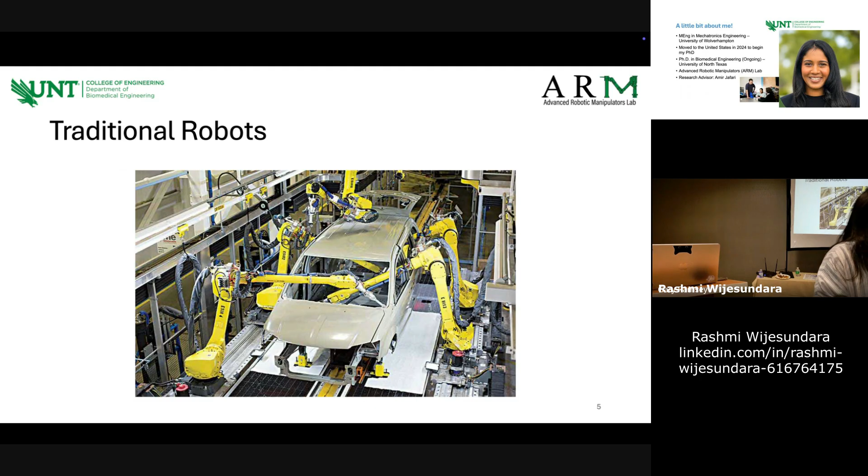Yeah. But also, the problem with these kinds of robots is, so this is a video from a few years back. I think my professor, when he presented here, he showed this video too. So it's... I don't know why.

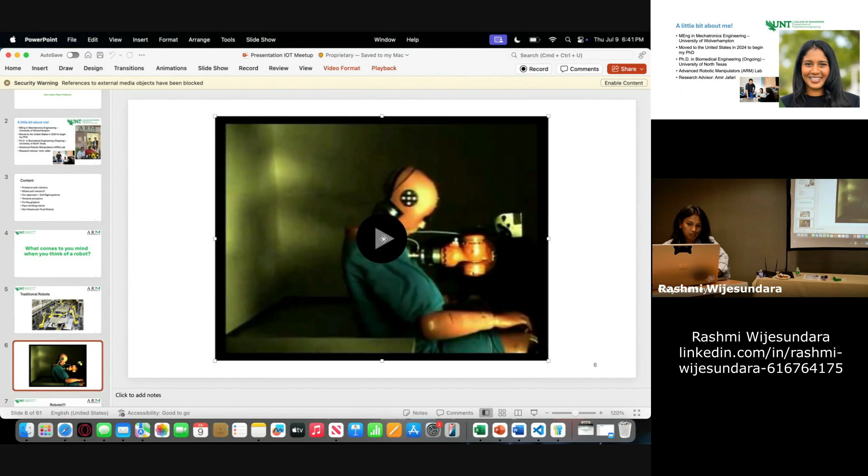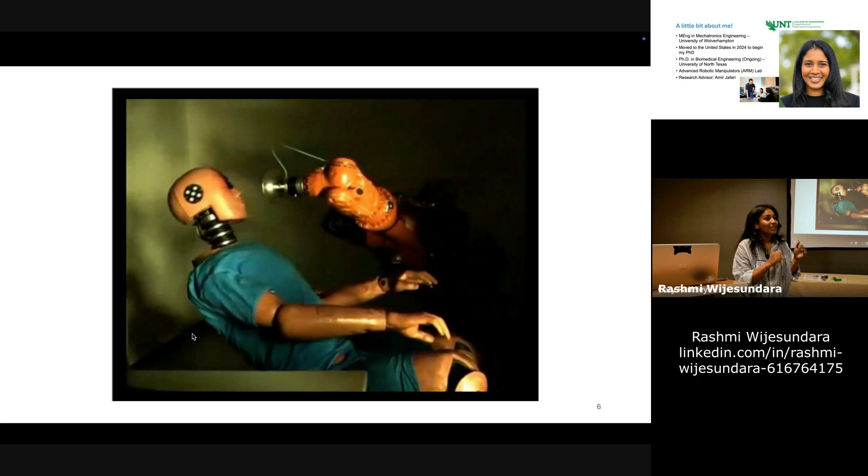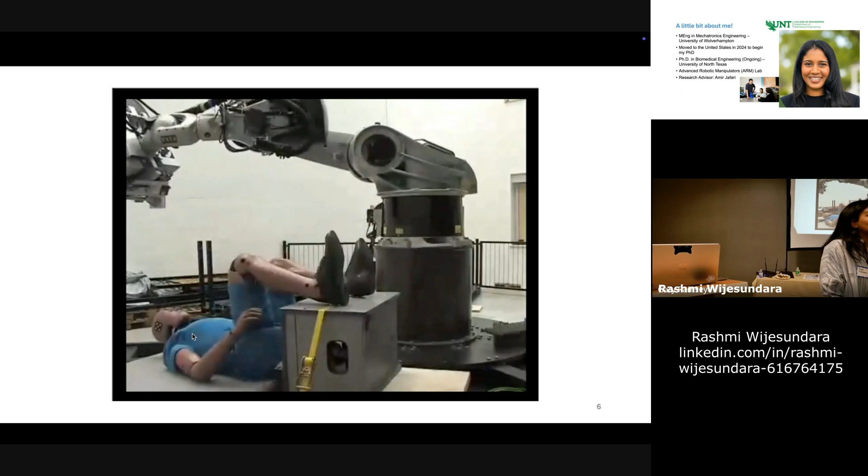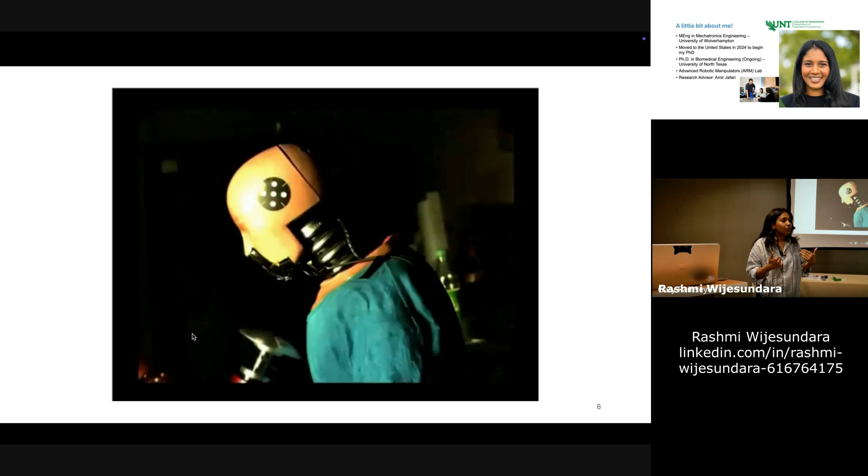So you can see that when the robot arm comes, it has a lot of rigid components and it cannot really compensate for anything. So if it comes and knocks on you, imagine a statue made out of stone and it just falls on you. So that's the problem with these rigid robots, because they're fully made of rigid materials. They cannot really adapt to the environment that we live in with humans, where humans are made from much softer materials and we can adapt to the world and compensate for little changes. But these robots have that problem.

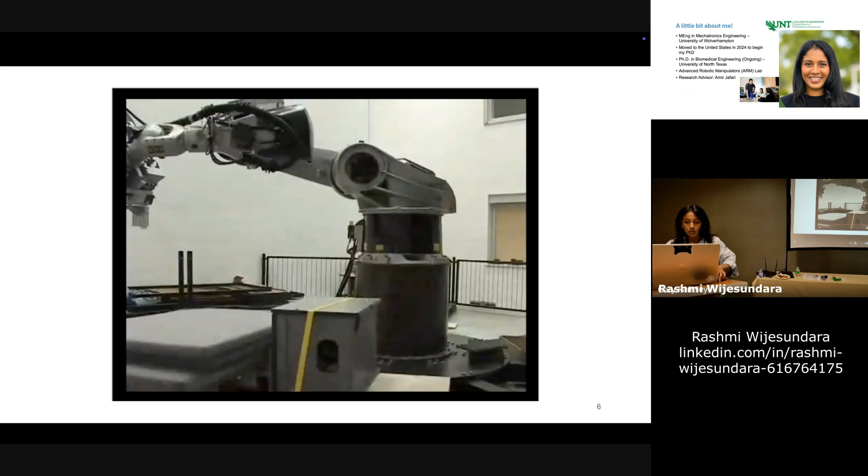So this is kind of a comparison. When I asked what comes to your mind when you think of a robot, most people said Roomba and Wall-E, but that's what we think nowadays. A few years back, starting around 1961, but most prominently around 2006, all these car manufacturing lines had the proper robotic arms. But nowadays, in 2026, we want robots not just to be in these factory lines, but to be with humans and interact with us in our daily life.

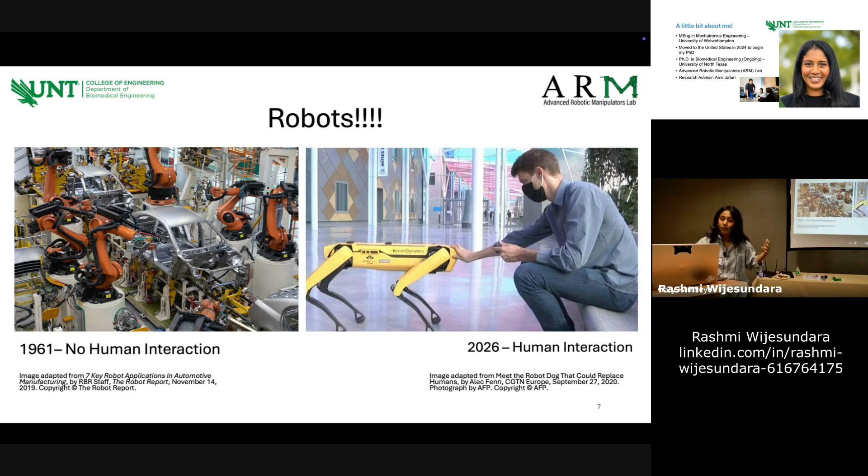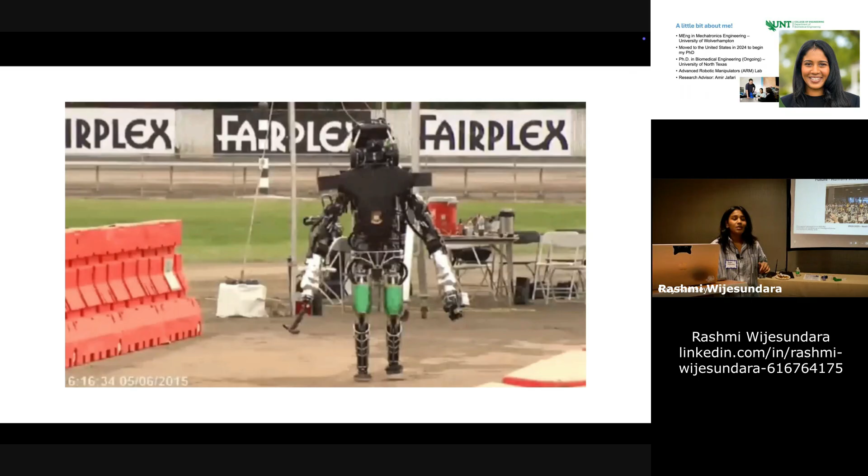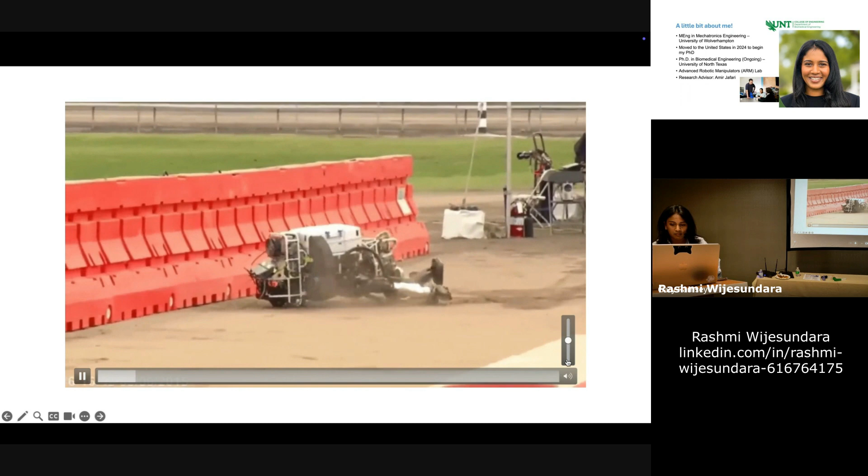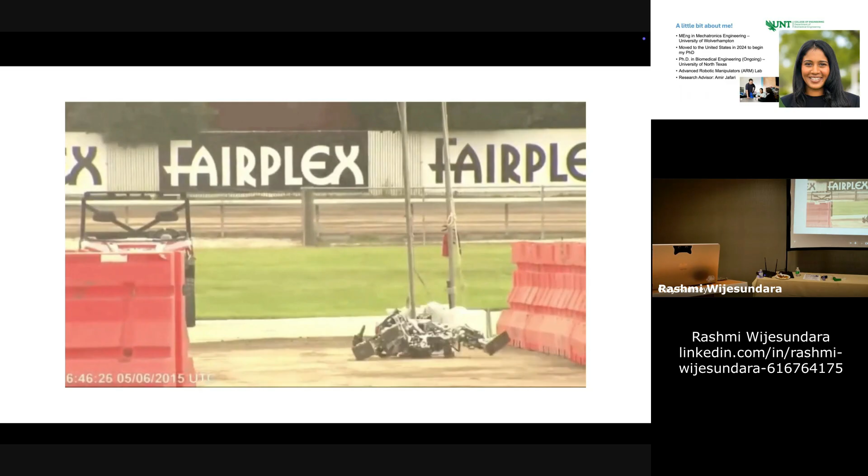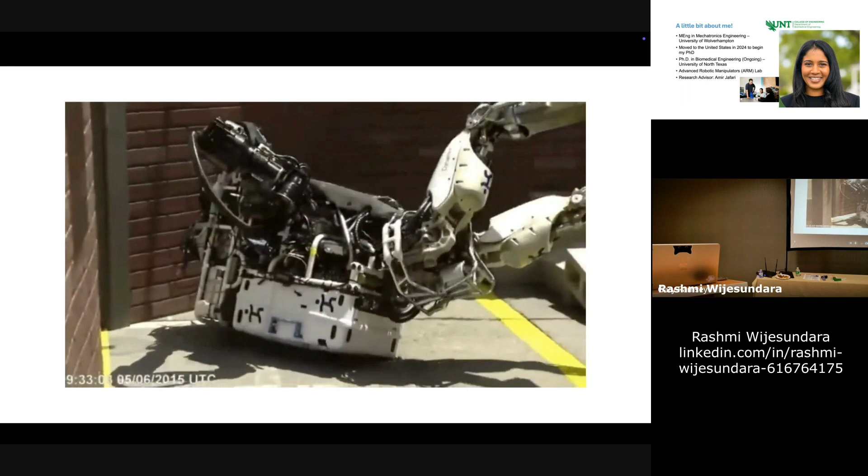So when we want to build robots for a world like that, we can't really want the robots to act more like this. So you can see here these kinds of humanoid robots. This video is from about 10 years ago. You can see that when these robots walk, if there's even a slight change in the environment, for example a slightly uneven surface, or when it's walking on sand, since the texture constantly changes and the world around us is very dynamic, you cannot really make sure the robot knows exactly how to behave in all these unknown scenarios. And since the body is rigid and the robot doesn't know how to react, it could fail like this.

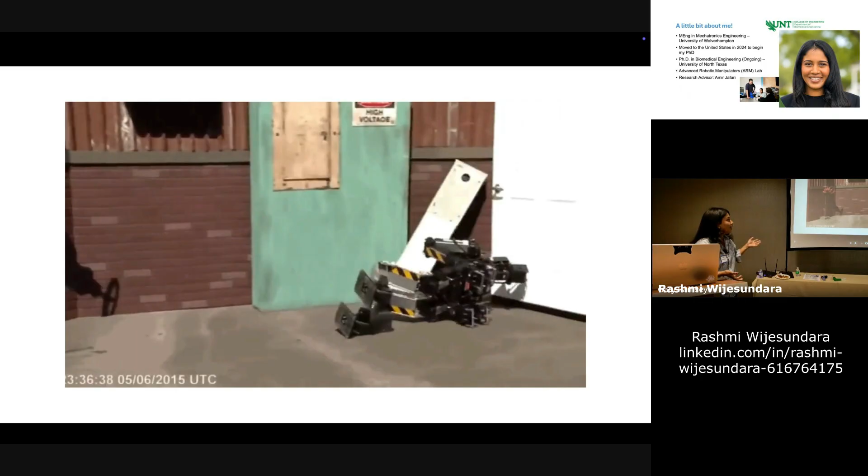So that's actually a video from like 10 years ago. But if you see videos from now, like Boston Dynamics and Figure AI, all these robots are much better than this. Most of the time they can be safely interacting with us, but still the body of the robot is rigid most of the time.

Which is good, but at the same time, it would be nice if we can make some parts of the robot softer. I'm not saying that we should make the full robot soft, but some parts of the robot could be softer, so it's better optimized and not fully relying on just software itself. So some researchers have thought, how can we make these kinds of robots a lot more compliant and adapt to the environment better?

One of the first methods was something called a series elastic actuator. Here the idea is instead of having the motor and the gearbox directly in contact with the external force, whatever the robot's going to come into contact with, you have something like a spring so that it mimics the softness in the robot. And this is really cool and it works.

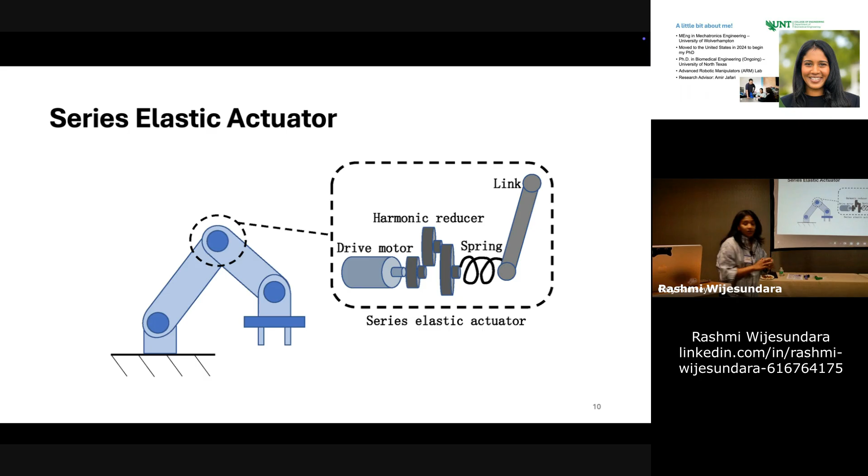If you have ever seen any videos of Boston Dynamics Spot, have you all seen any? You see that the robot kind of moves like a real dog. And it does that by mimicking this softness in software and in the motor design, not by actually having any soft components. But once again, this is kind of bulky and also not very precise.

So instead of that, around 10 years back, people have looked into the approach of building robots with softer materials. Are you familiar with Baymax from Big Hero 6? Yeah. So that's more of a robot we want, because I don't want to handshake with a robot and feel like a metal hand. I want to feel exactly how I feel around humans.

So this is actually one of the first soft robots that people developed a few years back. The idea is you use a soft silicone material, and this is pneumatically or hydraulically actuated. I can pass it around to get a sense of what this material is like. You have a narrow channel in it that you make in a certain geometry, so when you actuate it with air or with hydraulics, it gives us a certain bending motion. This is one of the first and simplest ones, where you could have multiple of these and use them to grasp an object.

What's cool with these kinds of grippers is you don't have to have any sensors. As long as you actuate it and it's around the object, it will easily be able to grasp the object. And you don't have to say that you have to close at this point, or you have to apply exactly this much force. So it's much simpler and easier. But there's a small problem with these kinds of robots, which I will get into. I'll pass this around so you can get a feel for what the material is.

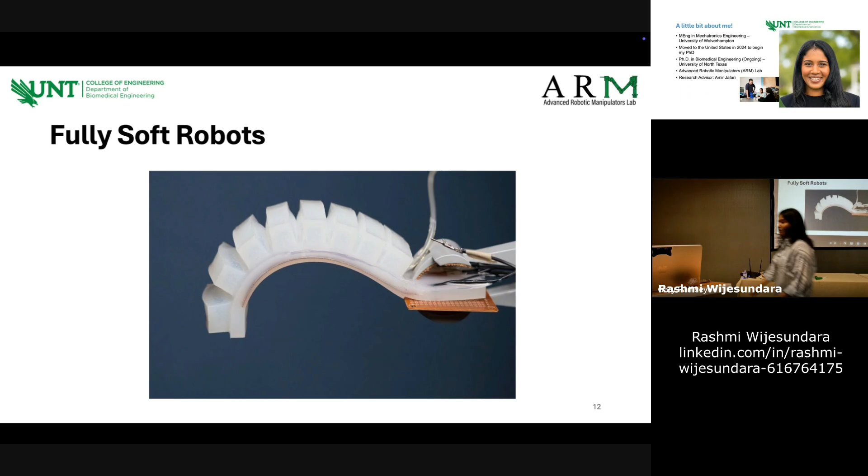As I said before, traditional robots are really good at performing repeatable tasks, they're very precise, and they can handle a lot of payload. Meanwhile, soft robots are inherently compliant, they can safely adapt, and they're much more human-like. So the question is, what if we have the best of both?

In nature, we see that biological systems are not just made from rigid materials. For example, if I take my hand, I have soft skin around bones, and then I have cartilage that can change stiffness. How humans and nature solve problems is not just a software problem, but also a mechanical problem. And together there's some embodied intelligence in these systems.

So what if, instead of approaching robotics with just a rigid body with really complex programming, you think about and optimize the body of the robot? In my research, I try to take inspiration from nature and biological systems, study the fundamentals of how they work, what we can use for robotic applications, and try to implement that. So these are a few of the animals and plants I'm interested in studying and mimicking their motion.

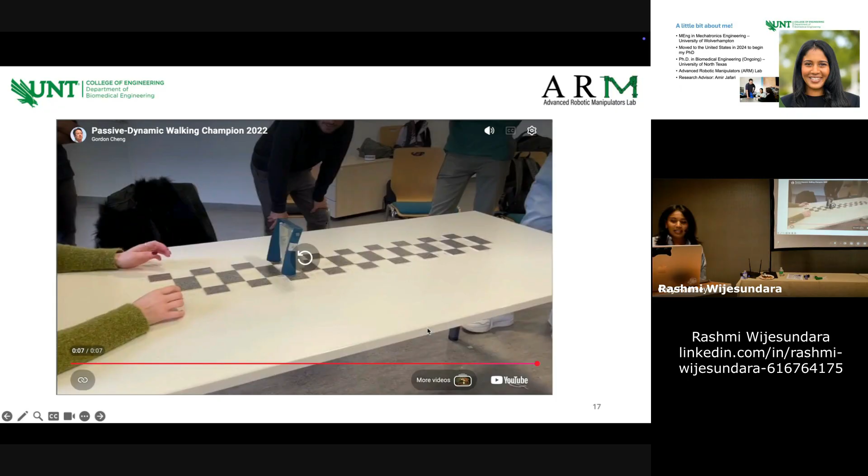So I want to show you all a video of what I mean by this embodied intelligence. So here you see, this is called a passive walker. It doesn't have any motors, it doesn't have any sensors, and you don't give it any power. But purely from mechanical design, you can see that this robot is able to walk through this path by interacting with the surface that it's on. So that's kind of what I was talking about in the sense of mechanical intelligence.

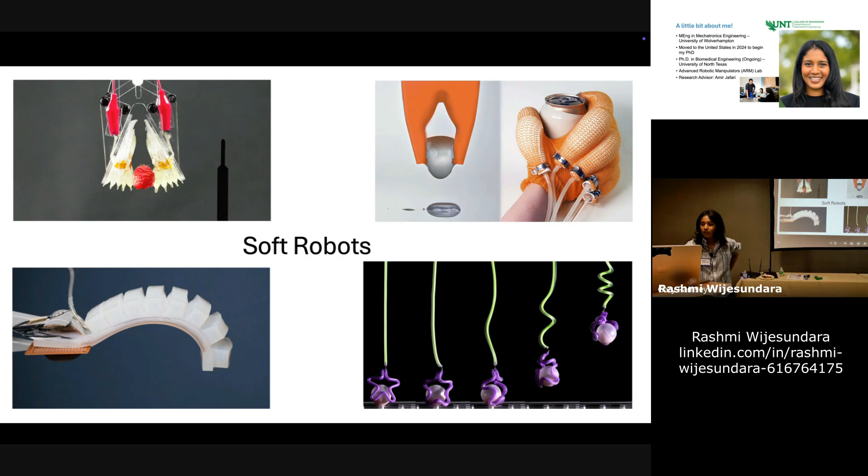And this is kind of the gist of a few different types of soft robots. So this is the previous one, and this is a pneumatically actuated glove that can help with hand rehabilitation. This is mimicking octopus tentacles for grasping objects. And this one's called a HASEL actuator, so it uses an electric field to actuate the fluid inside and actuate the ripple. So that's a few types of soft robots.

So this is another type which is inspired by a plant vine. Have you all seen vines growing on walls? These vines usually attach onto a surface and they just keep on growing towards the top. So the idea here is, imagine I'm wearing a sweater and I have a long sleeve. It's like a long tube. And all this material from the tube is pulled into one end. And when you pressurize it with air, it just gets everted out.

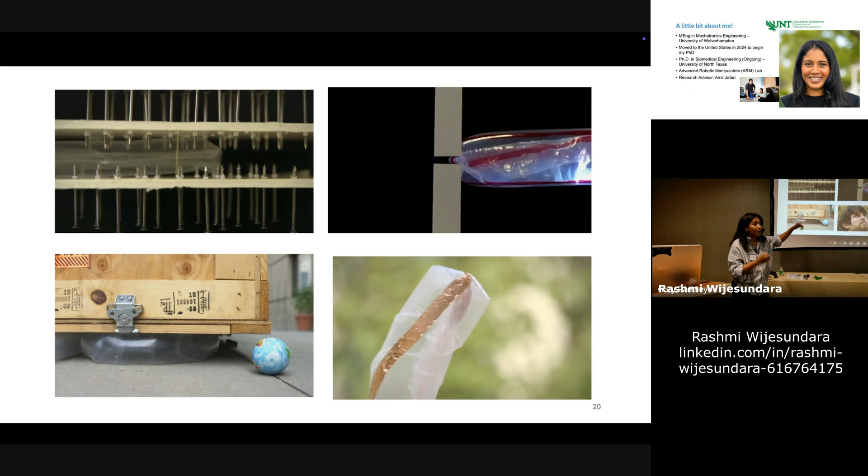And the cool thing with robots like this is that as long as you supply it with air, it can still keep on growing. So this is very useful for some kinds of applications. Let's say over here, as long as you make it with a fire resistant material and you fill the inside with water, you can evert out the body and use it to extinguish fires. And because the body is soft, it can squeeze through tiny spaces and adapt in very cluttered environments.

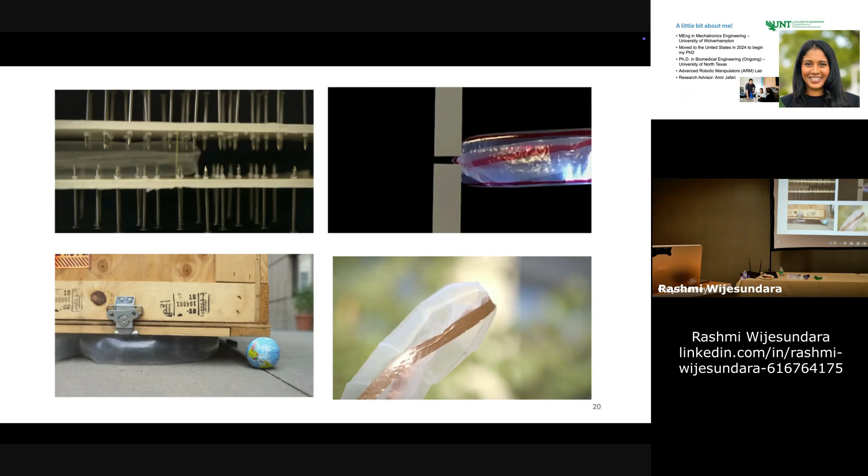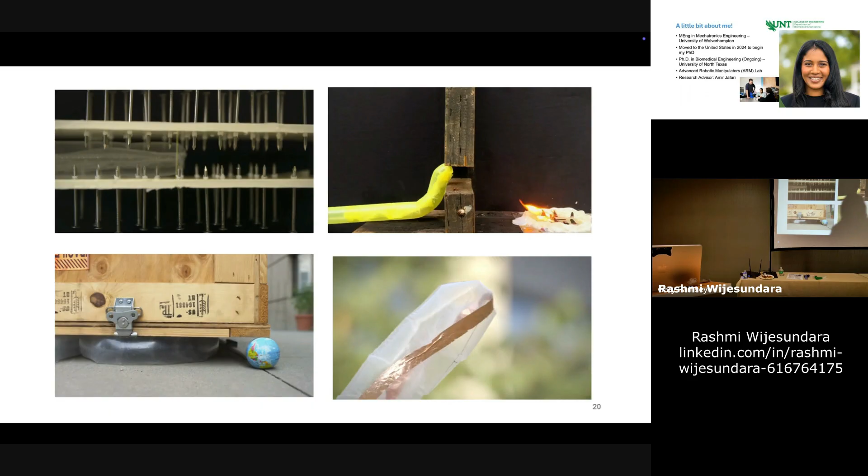And a cool application that I saw of this robot was when you want to dig underground, like pipes and holes. As you keep on digging down, it gets harder and harder. But using a robot like this, as long as it comes into contact with the sand, it just pushes sand away every time. So you don't have to apply a whole lot of force and you can dig deeper and deeper. And they used it for anchors in spaceships. So that was another lab I saw working on it. So this was kind of how it works.

So any questions so far, anything that I should explain in more detail? Just the idea between constructive robots and ISR sensory data collection, how the telemetry might be moved and collected and analyzed. So the thing is, most of the examples I showed now don't have any sensors. The idea was, since the robot's body is soft, it just passively adapts and moves. But there are some applications where you'd really need it to move in a certain specific direction. And I've seen people use different pneumatic lines or different wires with tendon-driven pulley systems to make sure that the robot goes in a certain direction.

Also, I've seen some people mount a little camera at the tip of the robot with a device so that as the material gets everted, the sensors and the camera get pushed outside and always stay at the tip. So then you can use that to make it move. So it doesn't sound like they're, let's say, autonomous. They're not autonomous. Yes, they're not. Okay. All right. That's helpful. Thank you.

But that's the current state it is. Okay. But people are working on making it autonomous. So here the base of the robot always stays at one corner. But I've seen some people working on a device where the motor and the everting system is within the capsule. It's like a little capsule, and then it just keeps everting itself up. I'm thinking we make an autonomous biomimetic design. Oh, okay. Yeah. That's interesting.

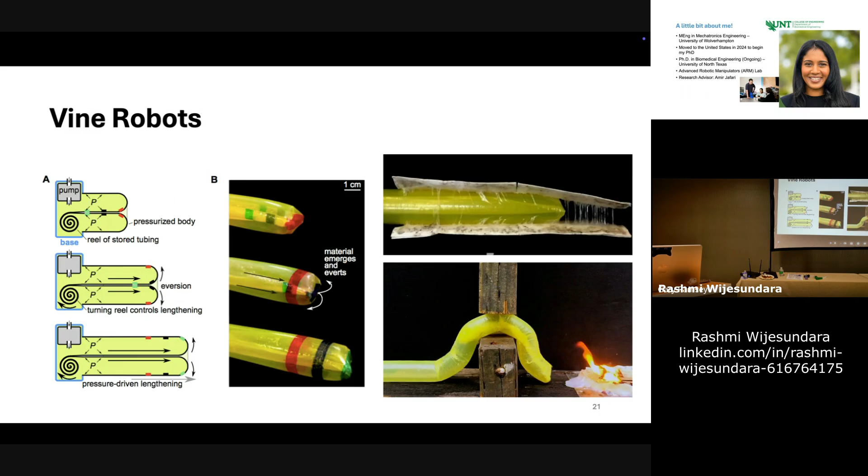Yeah. So as I said, the cool thing with soft robots is you can use it for very task-specific applications where previously traditional robots were not able to be used. For example, some of the applications that I have in mind are in surgical applications where you deal with extremely soft tissue and also extremely complex anatomy, and maybe underwater applications where the pressure is high, and you also deal with a lot of sea life where you don't want to apply too much force or damage the fish in the ocean, or a collapsed building, or even underwater pipe systems.

So these are all applications where my work could be used, but mostly we work in the lab and we try to develop the technologies. And sometimes in some of the work that I do, we target specific applications, but mostly I'm still in the progress of getting it developed.

So the first project that I'm going to talk about is called tentacle actuators. This is inspired from an octopus tentacle. I think octopuses are really cool, and it's one of my favorite species. And the cool thing with octopuses is, when it comes to humans, we have one central nervous system, and neurons go throughout our body. But octopuses have their nervous system spread out throughout their body. So if you have an octopus in a fish tank or something, it could sense what's going on around its body.

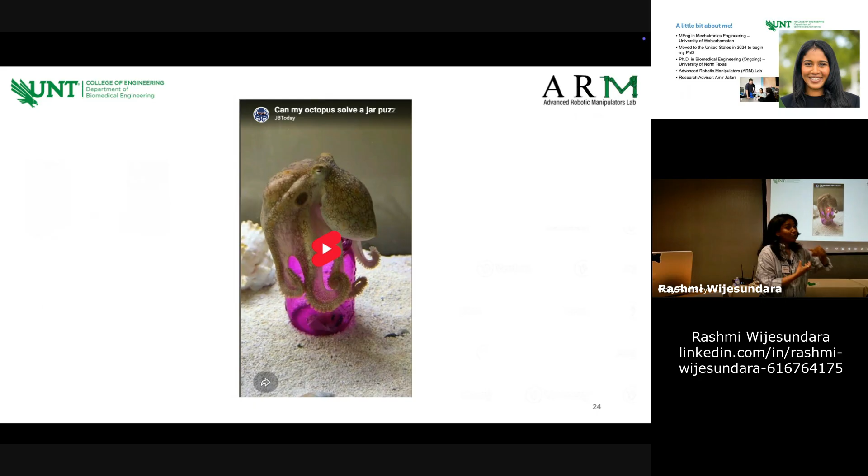And here I'm going to show you all a little clip where there's some food trapped inside a glass jar. This octopus senses that there's food inside the jar, and it wraps its body around the jar, opens the jar and tries to get this food. And what's cool about this is, imagine you had just a traditional gripper made from rigid fingers. It cannot do all this motion in such a simple way.

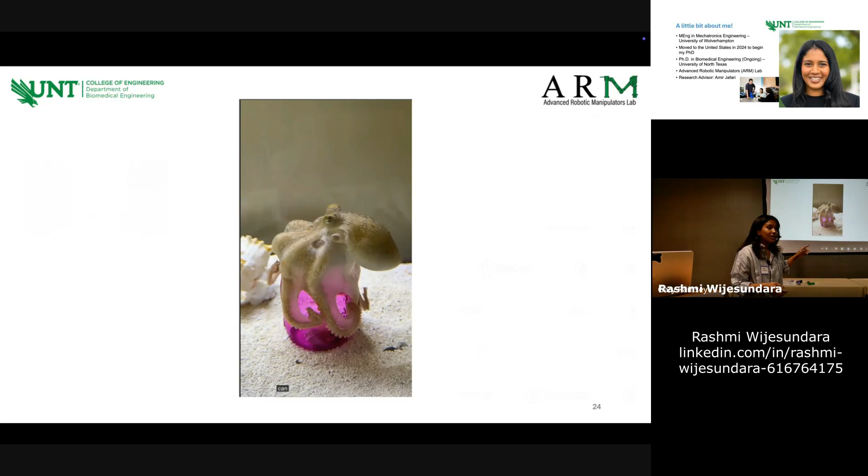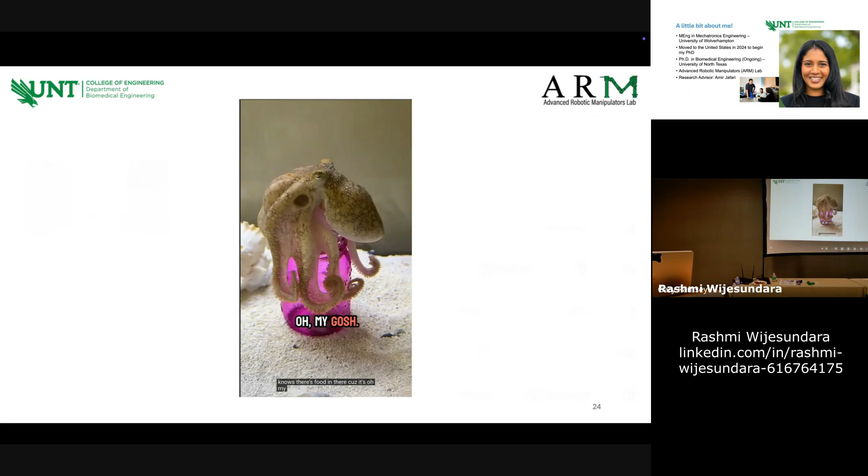But the fact that the octopus body can tune its stiffness, it has a whole lot of tentacles. It can adapt to the lid of the bottle, and then it can push its tentacles inside and grasp the food. That's what makes octopuses really intelligent, and also a really cool thing for us to study in robotics, because we can use such kind of design instead of traditional grippers for certain types of applications.

So I just wanted to go back to this slide and also show what's cool with these kinds of tentacle-like designs. One tentacle always coils, and you can design it in a way that it coils in different ways. But imagine a whole bunch of tentacles collected together. You can grasp a very irregular, soft object at multiple points.

So instead of trying to grasp something just by the hand, like this water bottle, I can grasp it at multiple points so the force gets distributed all throughout. And that makes it able to grasp really complex objects with no sensors in a very gentle way. So for the first tentacle, how we designed it in our lab: the material that I passed around is essentially like a long party balloon that's elastic. So when you inflate it with air, it expands laterally.

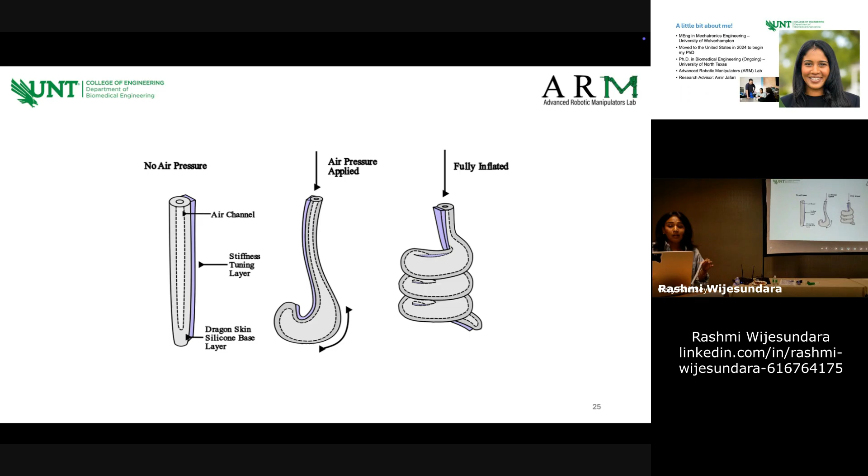It just randomly coils. But we tried to make this structure very even and always coil in the same pattern. Because then when we have a whole profile of bending curvatures, we can figure out what application we want. And we can fine tune the size of this tentacle and also how we want it to bend. And we can program how it bends.

So this was kind of the asymmetry that I was talking about, the fact that this point is stiffer than the other end gives that coiling behavior. So this is more of how we made these tentacles. I'll later show a video of how it works.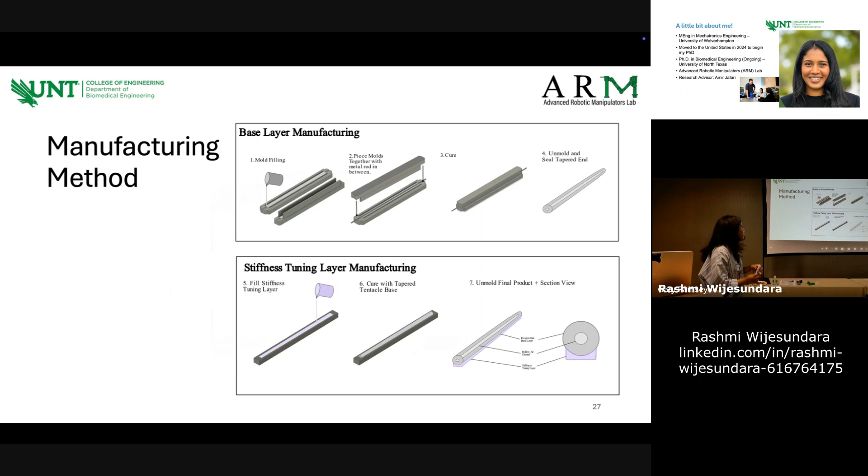But we literally 3D printed a mold, and then we used the steel rod to cast it out. Since we still cannot 3D print silicones, we cannot print these structures. I mean, there are 3D printers that can 3D print silicones, but we cannot print such big structures and it's not easily accessible. So we did the casting method.

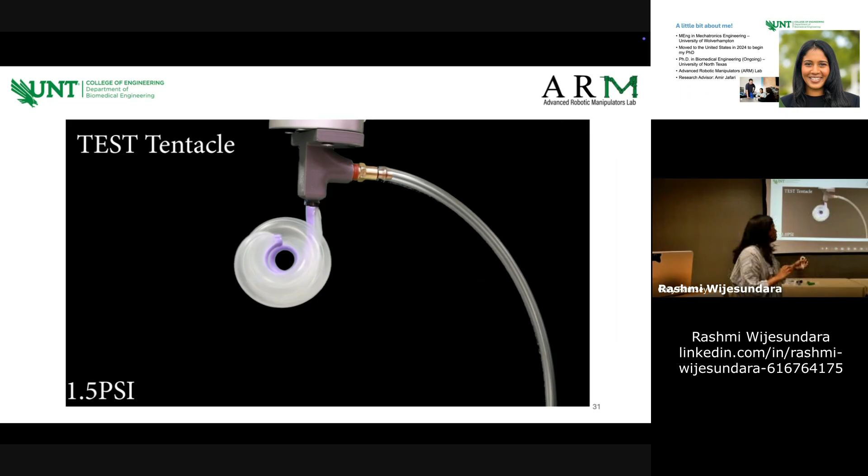And we demonstrated how to grasp different kinds of objects, and I can show video. So this is more of the different bending profiles with different materials. And this is how the tentacle actuator starts actuating. So we did some machine learning based on pressure, the geometry of the tentacle, how the bending profiles change. So anybody who wants to build a tentacle can input what size they want, what pressure it needs to be working on, and what kind of payload it needs to handle. And then it will generate what dimensions and material selection need to go into the design.

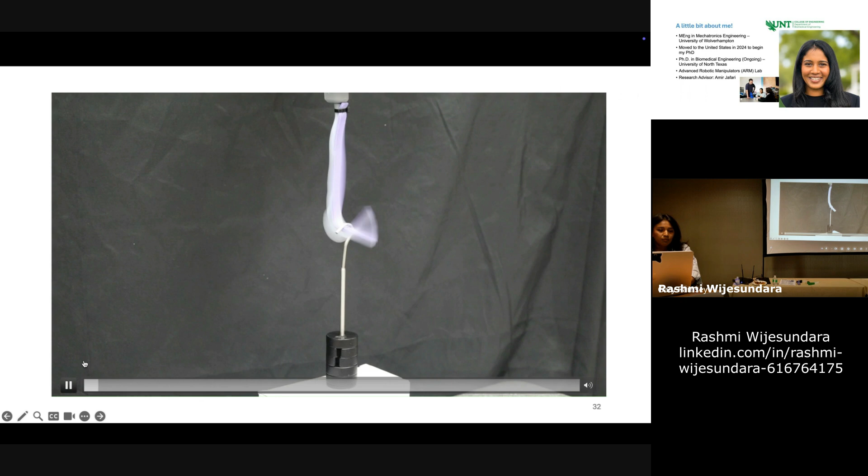And it's really interesting that this was made from a silicone called EcoFlex with a layer of Smooth-Sil, and one tentacle was able to carry around 300 grams of weight. But in some of the testing that we did, it was able to carry even more. So a bunch of them together can carry quite a lot.

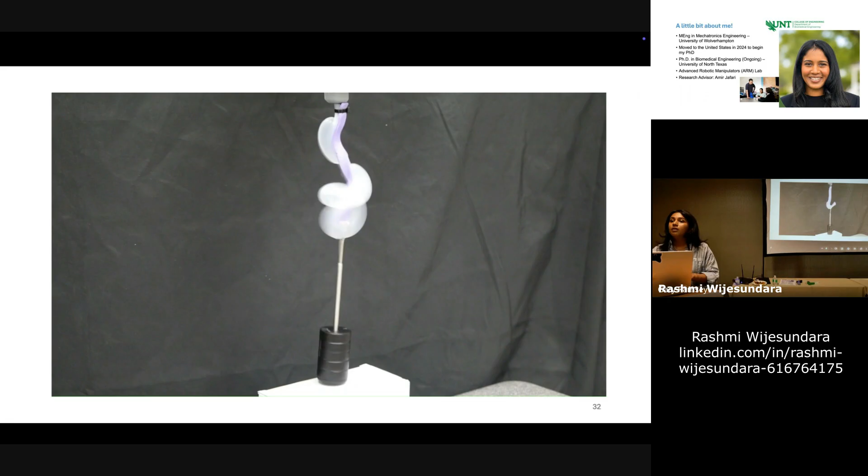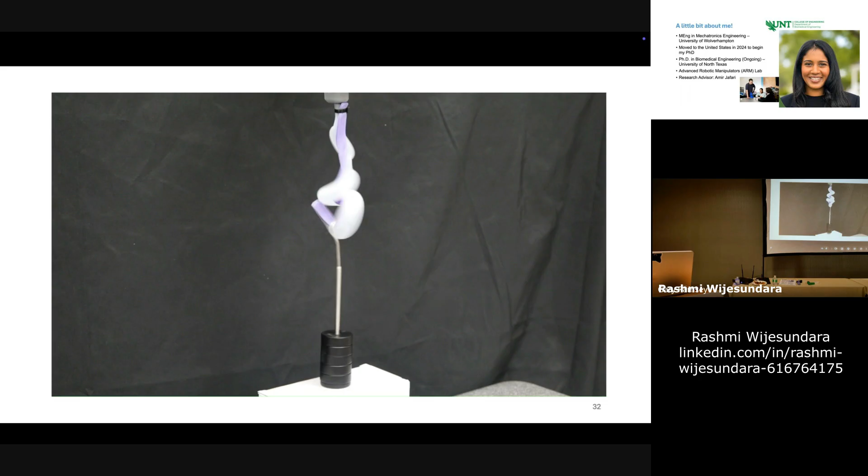Rashmi, quick question. I came in late, so I might have missed this answer, but is it always the case that the tentacles are going to be holding objects that are inherently harder than them? Or is it going to be the case where the object they are trying to hold is softer than the actual material of the tentacle? And the reason I'm asking is, how do you determine in the latter case how much pressure needs to be applied that is not going to deform or even break or spoil the object being held? What have you done in that regard?

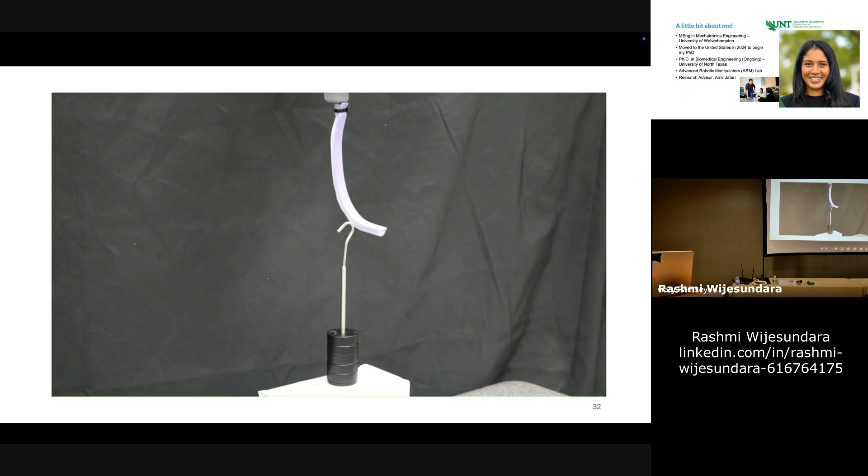So I can show you. This tentacle that I passed around is made from EcoFlex, and it doesn't have the strain limiting layer. But there are many types of silicones that you can use to build, and they all have different stiffnesses. So it depends on the application. We also know mathematically right now how much force it applies at a certain pressure, but we haven't done any testing to see how it physically applies when it actually holds something.

But if I were to design something, I would try to figure out the stiffness of the object that we're trying to grasp, and then see how much weight it has and its dimensions as well. And then based on that, you can choose even softer materials with a higher pressure. You can handle a bigger object. So you can fine tune those parameters to figure out what would suit your application best. But for most applications, it's not just one silicone. You can probably get away with using a few variations at a few pressures.

And this is how it bends at different pressures and different materials. We have tested 120 tentacles with different compositions, and we trained the model to predict for the rest of the materials beyond those we did physical testing on. So that's more of what we have done. But right now I'm collaborating with two other universities to make these tentacles much more micro scale. We just started, but I want to let you know the idea of what we're trying to do.

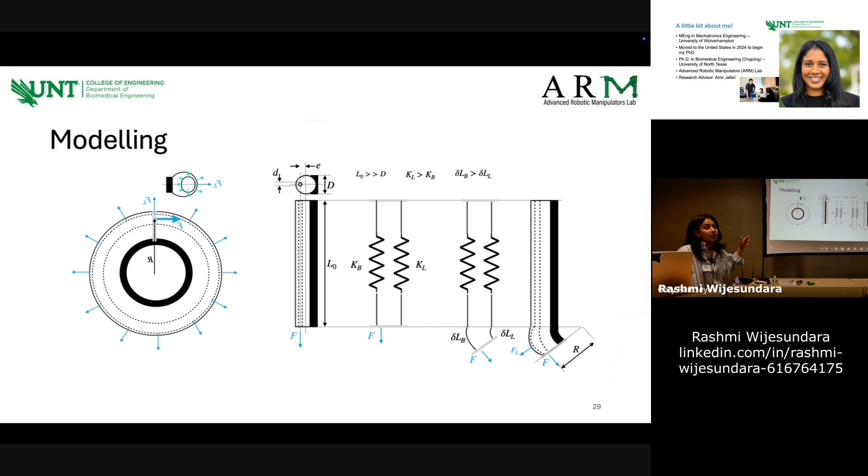But in terms of mathematical modeling, we modeled it as two springs with two different stiffnesses, which I can show. So the idea is one spring has a higher stiffness than the other one. So when you apply a pressure, it bends towards that side. And that's how we did the model. But what we actually did was we made a whole bunch of tentacles with different materials. We collected video data of all these tentacles.

Then we made a machine learning model, which one of the other people working with me made, and he predicted the curvature. So then we have a whole bunch of curvature data for different materials. And since these are hyperelastic materials, you can predict, for the material compositions that we didn't test, what the curvature is going to be like. And then we validated it with the mathematical model. Thank you so much. Interesting. Yeah.

I'm wondering, have you done any work with sensors embedded in these soft robots that will tell you how much pressure to apply based on the object that you're trying to hold, and whether to ease off on the pressure or add more pressure with the same material, so that you're not having to change materials based on the object you're trying to hold? Have you done any work on that kind of sensory feedback, kind of haptic feedback with humans?

That's actually really interesting. And that's kind of the second stage of what we are looking into. And the problem with sensors, as I said, most of the sensors that are existing, they're not super rigid, but they're flexible plastics. And when you attach them to tentacles, we have tried attaching them, the tentacle rips and tears. So that's where flocking comes in, where you take the sensor and apply a thin layer of fibers, like rayon or nylon, very thin fibers, and then it increases the surface area. And then we apply it onto the silicone so it sticks better. So that's something we're right now trying to do.

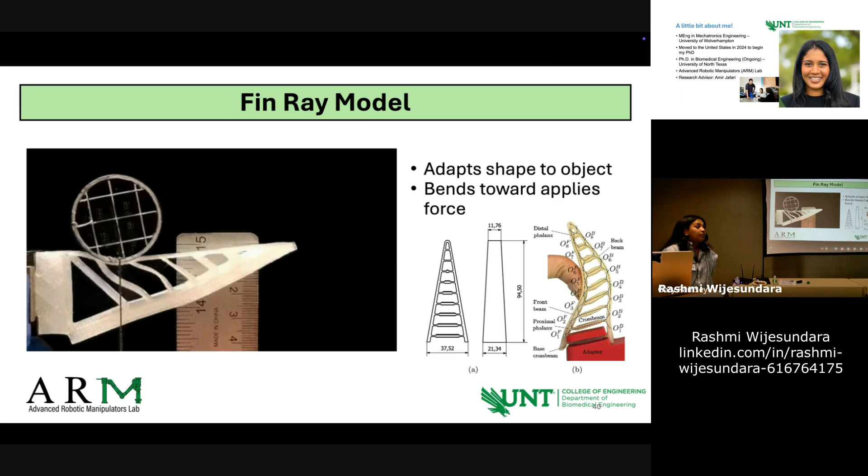So for our application that we are targeting, you can see a small clip of us doing load testing on it. What we again tried to do was, if you just make it from a soft material like this silicone, it's pretty flimsy, and I'll pass it around. But the moment I use another material like TPU, you can control how it moves much better. So we were trying to add again the Scrub Daddy material into it and see if we can increase the load on the fin ray.

So this is a clip of our design. It has the PCL strip inserted into one side of it, and there's a Joule heater as well. So when you heat it, it stiffens and softens, and then changes the payload while the fin ray still gives its compliance. And the application that we wanted to target was something called alligator forceps that they use in surgical applications, and the tip of this whole forceps is made from a rigid metal, like stainless steel. But if you accidentally apply too much force when you try to manipulate with this, they can damage the blood vessels and so on.

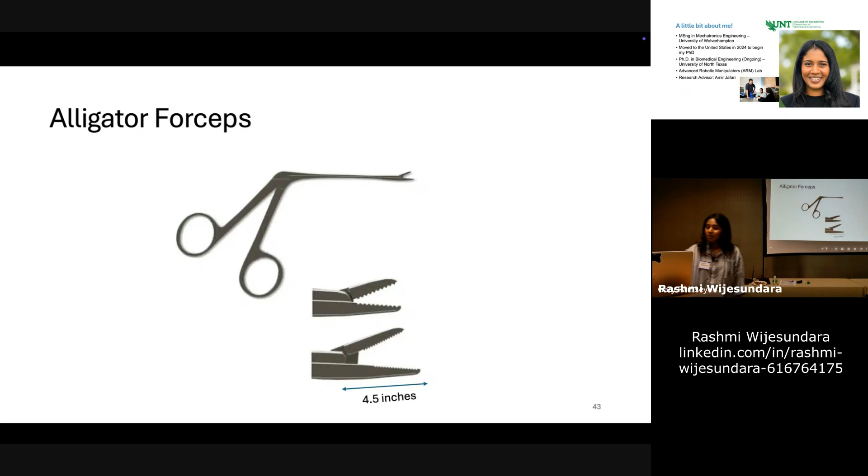So what we thought was, can we use this design, scale it down to this scale, and see if we can replace the tips of this alligator forceps. So that's what we've been working on. But the problem is, when we try to scale it down that small, it becomes really hard to manufacture, because this tiny feature is a lot smaller, and these walls are so thin. And especially with a material like silicone, it's really viscous. It's kind of like ketchup, the texture of silicone, it's that thick. So you cannot really push it into a mold that's that small.

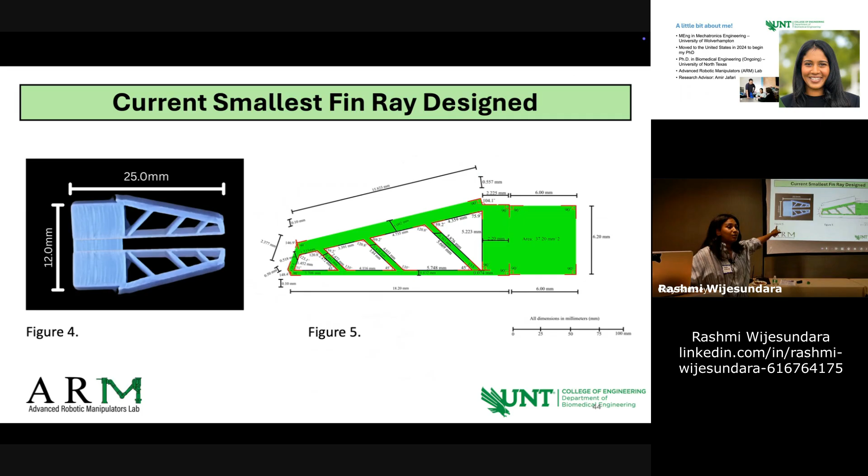Even 3D printing becomes a problem, because most 3D printing nozzles, the smallest one would be around 0.02 or 0.2. So when you try to extrude out this fluid, since it's so viscous, it's really challenging. So we actually looked into so many methods, and this is the smallest one that we have manufactured so far. And the method that worked the best for us was casting it. So we made this special mold. It's very different from a usual mold.

It has multiple pieces, and we used a type of silicone called PDMS for this. That was what gave us the best in terms of structural stability, and also less air bubbles when you pour in the material. And at the same time, you also have to add your PCL there to give it the rigidity that it needs. And I can also pass around a small scale version of what I'm talking about. So this is the casted one, and this is the 3D printed one.

So we 3D printed it from TPU, but the big scale one, it's really flexible, right? But the moment you print it this small from the same material, it becomes a lot stiffer. So you cannot use that material anymore when you want to use it at small scale. And this is the slightly bigger one's PDMS.

Quick question. Is there any reason you have the edges parallel all the way as opposed to trying to mimic a human hand where they kind of diverge? So when you hold something like a human being, you have a lot more surface area contact with the object. Is there any particular reason it's not flaring and it's always rectangular? Curious.

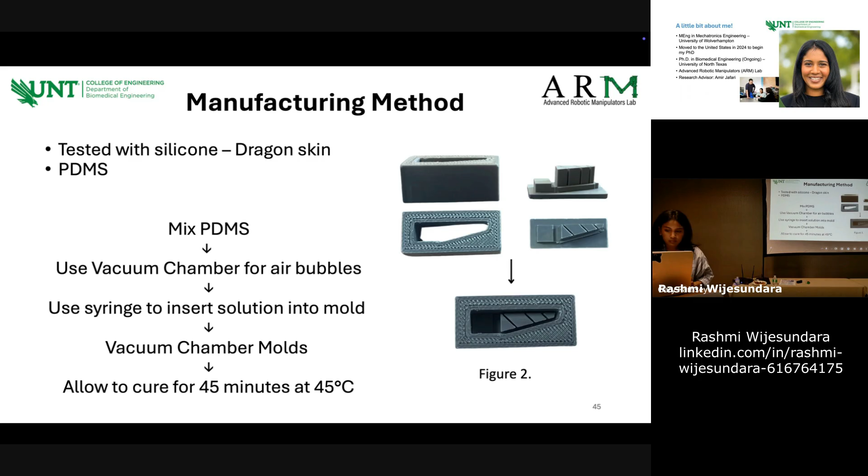So also the same idea with the LCE, instead of having it actuated with heat, because when you try to put something inside the body, putting a lot of heating elements becomes the issue. So we were looking into how we can add tiny ferromagnets that you can place around the fin ray. So you have two magnets around it, and since the material is soft, you can use the magnetic field to bend the material and control how it goes. So this is also something new that we're trying to work on.

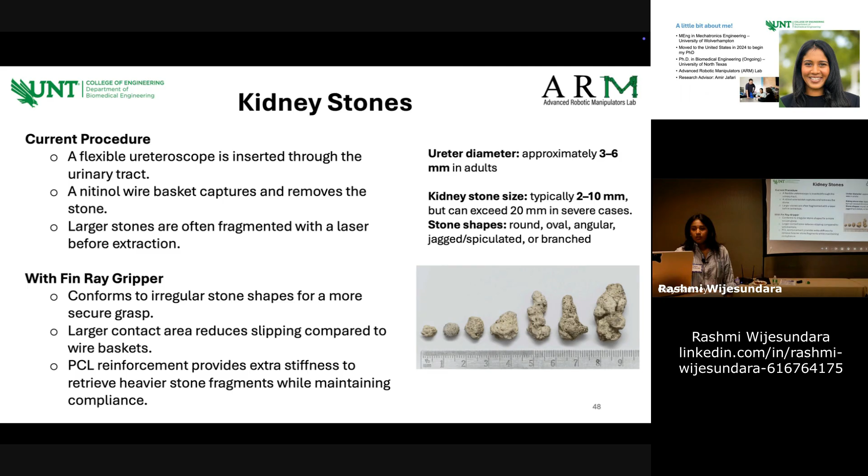And so we're collaborating with SMU on this, and they've been interested in seeing if we can use these kinds of fin ray grippers for moving kidney stones, and because it's really soft, you can push it in the body and remove these kinds of stones. So that's more of what I do in terms of manipulation in soft robotics.

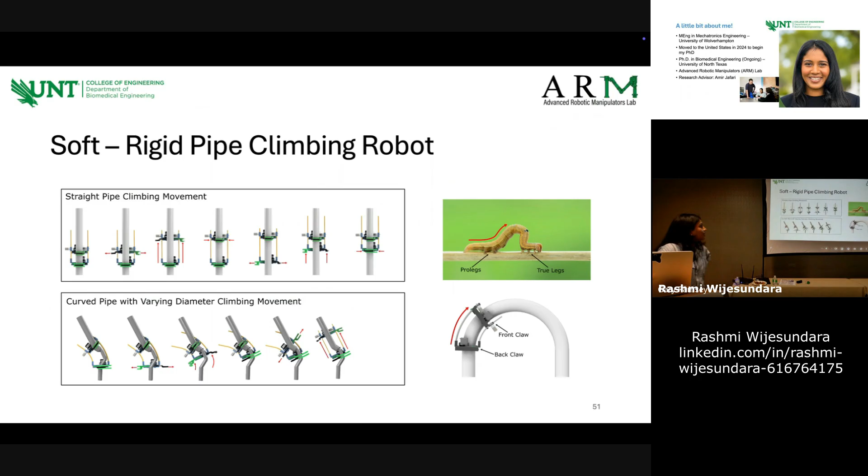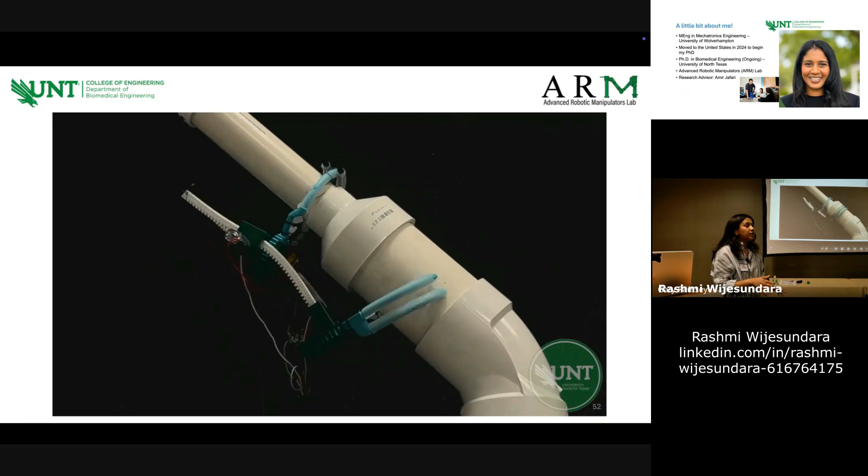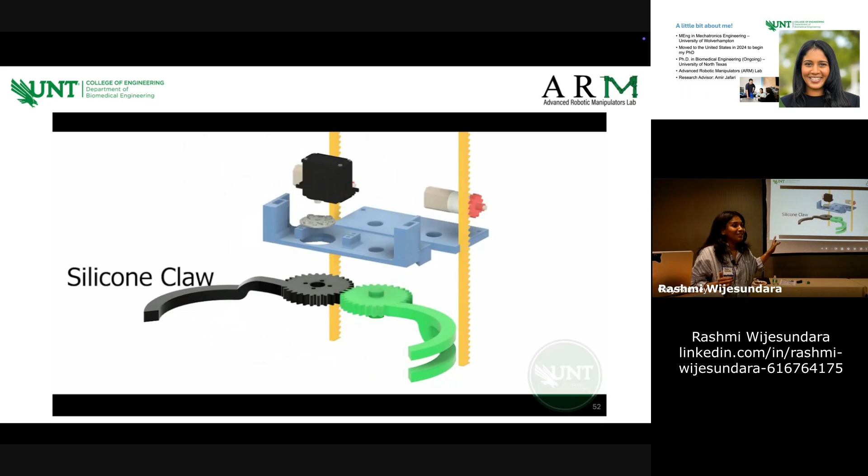So we try to do robots inspired by snakes and also inchworms, how they climb on walls. So this is my design of the robot. I'll first show the video of how it works, and then I'll explain a little bit about the robot itself. So what we did was we combined a soft material with a rigid material, so it can adapt to pipes of different diameters and different angles. This is just a third iteration. It doesn't work the best yet, but we are working on improving the design.

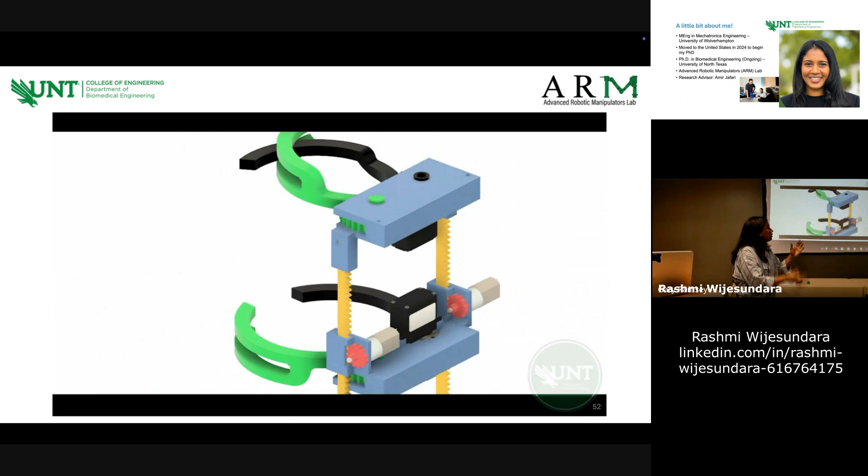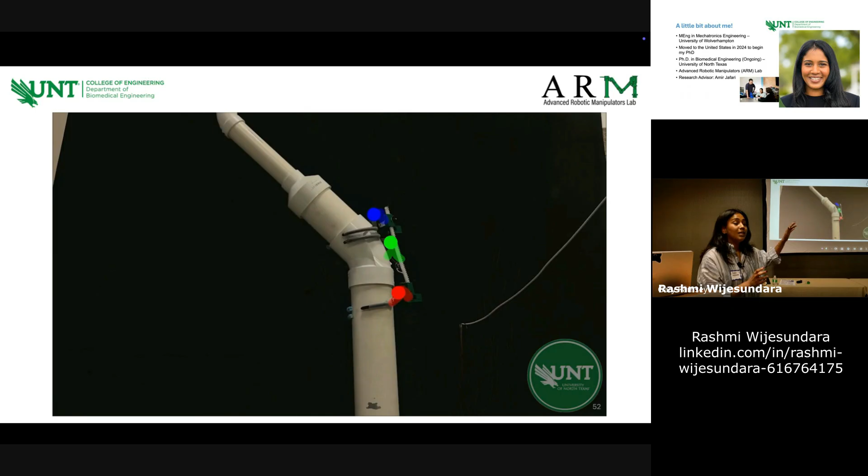So it literally has two claws, and the two claws can be moved around the rack. The racks are made from TPU, a really soft material, so it can adapt to pipes. So very few sensors, much less bulky compared to the existing designs. And we did a machine learning model to track its motion. Right now, this pipe climbing robot doesn't really have a lot of sensors or the ability to autonomously navigate, but those are areas that we are looking into.

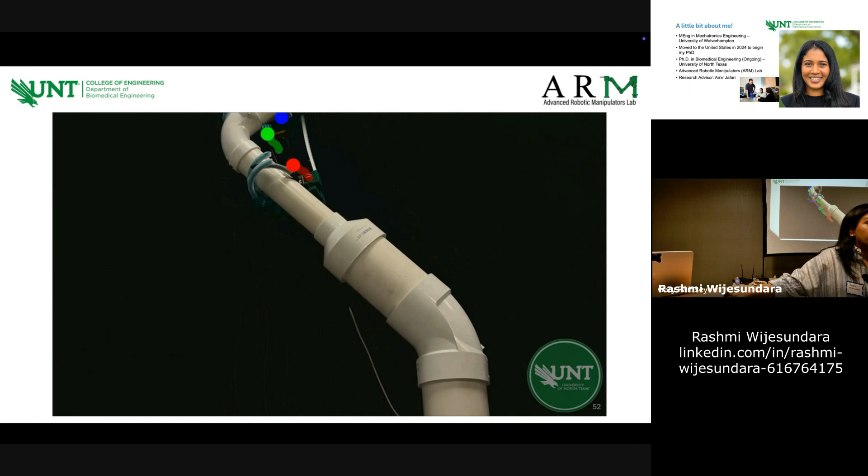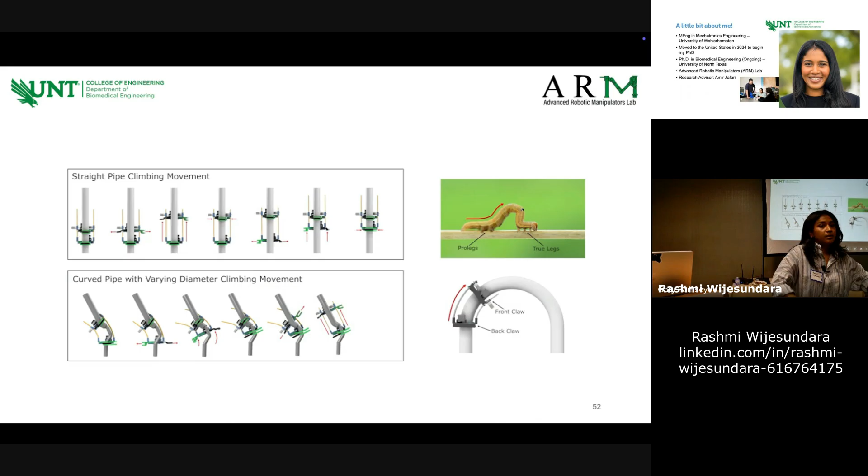Where is the actuation for this robot? Is it on the pipe climber or is it... On the robot. So we have two DC motors and two servo motors. The servo motors are used for the claws, and the DC motors make it move up and down. So is it operated by a battery or do you have a power source? We have a power supply. Right now it's connected to a power supply, and we have a joystick controlling it moving up and down.

But we were more interested in whether this kind of design can work, because previous pipeline robots were a lot more bulky. And even this one had a lot of issues. The video that you just saw was actually an hour-long video. It was really slow. We sped it up. But we're trying to make it work smoother and better. So that's what we're working on. So the last project that I'm going to talk about, yeah.

Sorry, in that pipeline robot, which ones were the soft part? The claws look fairly rigid. Yeah, so this is the overview of the design, and the claws are made from PLA plastic, but this yellow color thing, that's the rack, and that's made from TPU. It's not fully soft as silicone, but it's not fully rigid as PLA. And the idea is it can move around pipes and things.

Yes, because if it's a fully rigid robot, you have to have motors or some kind of actuators at each point to bend and adapt. But since here the two parts that connect are soft, as long as the robot clamps onto the top and the other part of the robot adapts to the bottom, it just bends and adapts.

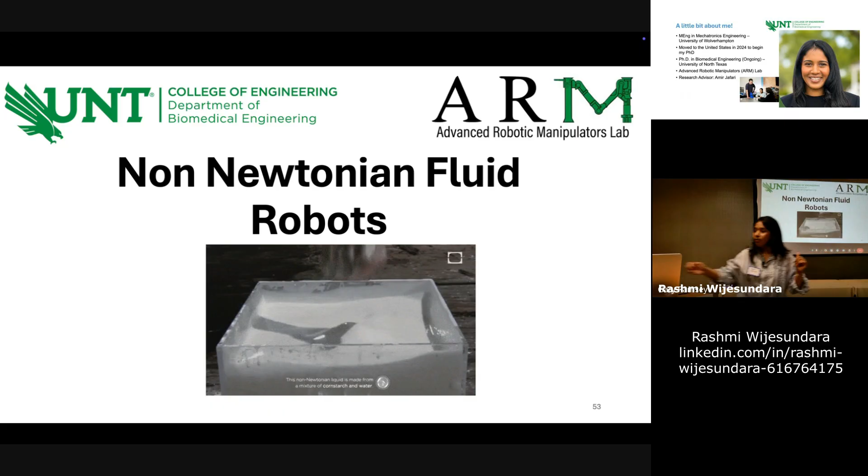Are you familiar with any non-Newtonian fluids? Yeah. So the idea is when you mix cornstarch with water, that's the most basic non-Newtonian fluid. When you apply a force really hard, it acts like a solid, but the moment you apply a very low force, it becomes more liquid. So what we are trying to do is, it's like a spring mass damper system.

Let's say I want to build a robot that doesn't have any wheels and wants to move on the floor. So we try to use these properties of non-Newtonian fluids to damp out and then move across surfaces for locomotion. This project we just started, and right now we are trying to understand the rheology, so how the viscosity of these non-Newtonian fluids changes and what kind of forces and oscillations best give the properties that we look for. We have made the first version, but it's something we're working on.

I'm sorry, I'm a bit lost. Is the fluid housed in some kind of a housing? If so, what is the coefficient of friction of that with respect to the floor?

How would you move that across the floor? Oh, so the idea is this has a spring, and there's a linear actuator that's moving the spring. When it moves the spring, the non-Newtonian fluid changes its stiffness when you apply force on it. So depending on the movement of the springs, the stiffness of the non-Newtonian fluid changes, and when that changes, it makes it move forward.

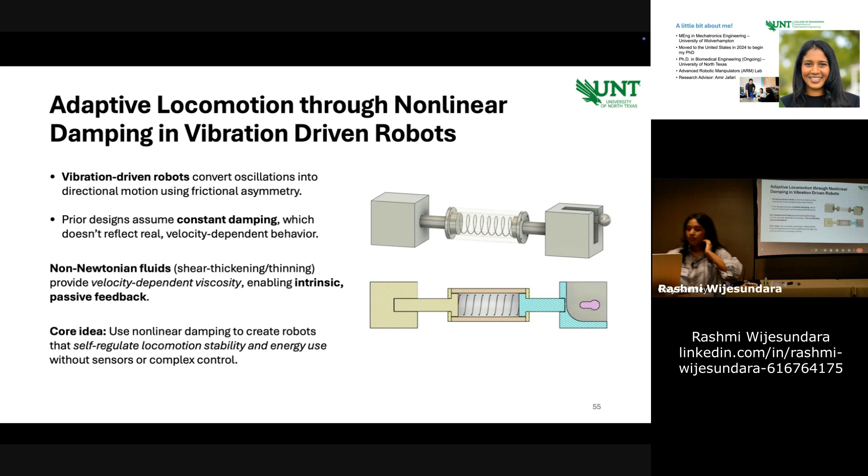But you're still going to have to be mindful of the friction between the two surfaces, right? Yes, that's obviously a parameter that we have to consider. But the cool thing is, once we do the rheology for the non-Newtonian fluid, we can change how fast the oscillations move. So we change how much force it applies, and as a result, it moves differently. And this is kind of an overview of the CAD design that we did for the initial prototype.

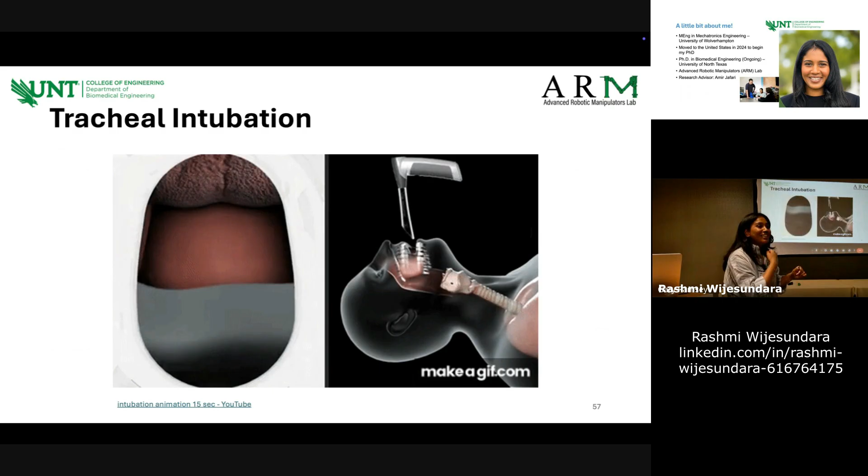And lastly, this is one of my side projects that I've been doing, and we've been pushing it for some of the medical device competitions. Here the idea was the vine robots that I previously talked about, those soft robots that grow. Typically in intubation, they have a very rigid instrument that you put in your mouth, I don't know how to pronounce it, that instrument, the one you see in the video.

You push it in the throat, and it's semi-rigid. Depending on the anatomy of the person, for example little kids or elderly people, the anatomy changes, and you have to put it in really fast, within less than a minute. If it takes longer than that, it could damage the vocal cords, and the person could die unless you perform intubation in a very short time.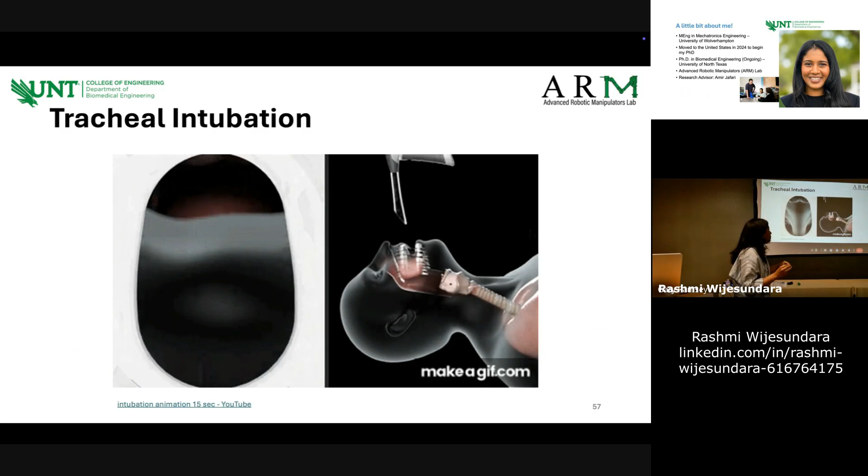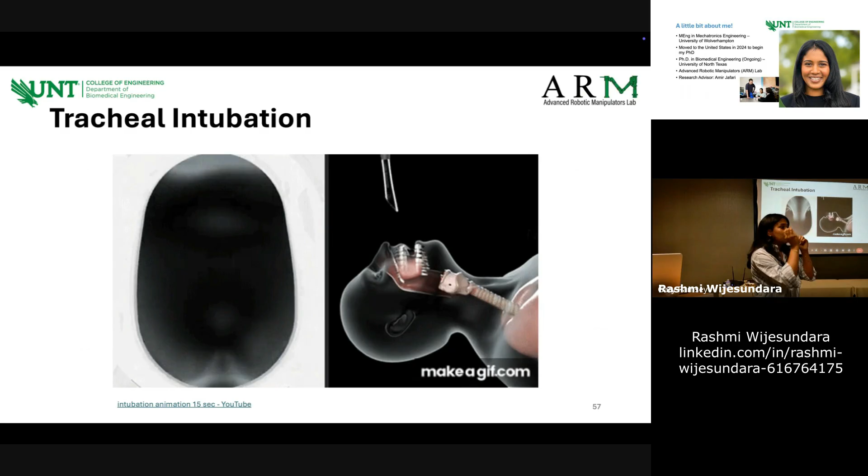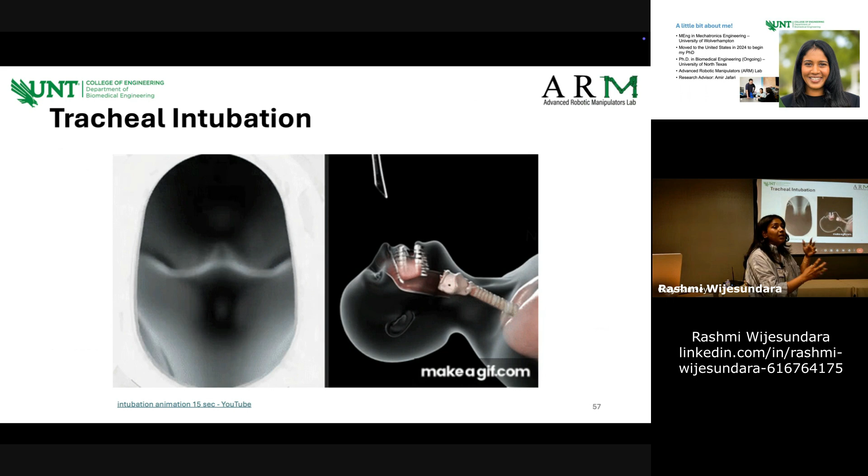Some other researchers from Stanford have worked on using vine robots to build an intubation device, because you can put it in the person's mouth, inflate it, and the soft robot will just adapt to the anatomy, go in, and open up the trachea. So we are working on improving that design, making it more scalable, and actually testing the dynamics of these kinds of robots. That's one of the applications of vine robots that we are focusing on.

Overall, that's a bit of all the projects that I work on. The big idea behind my research is how to approach robotics in a much more bio-inspired way, integrating soft materials with rigid materials. When we think of a robot, we should not think of it in a one-material approach, because there are a lot of cool materials out there that get actuated with heat, electricity, magnetic fields, and by integrating them we can make more efficient, simpler, better robots that can interact with us better.

The reason is the world that we live in has evolved for thousands of years, and it's made for humans, animals, and plants. So if we can borrow principles from those things and integrate them with robots, we can build much better robots. For example, a water bottle is designed for a human to open and drink from. So if you design a robot similar to a human hand, it's going to be a lot easier for it to interact with our world. That's what I do with my work, I hope you enjoyed it, and I'm open to any questions.